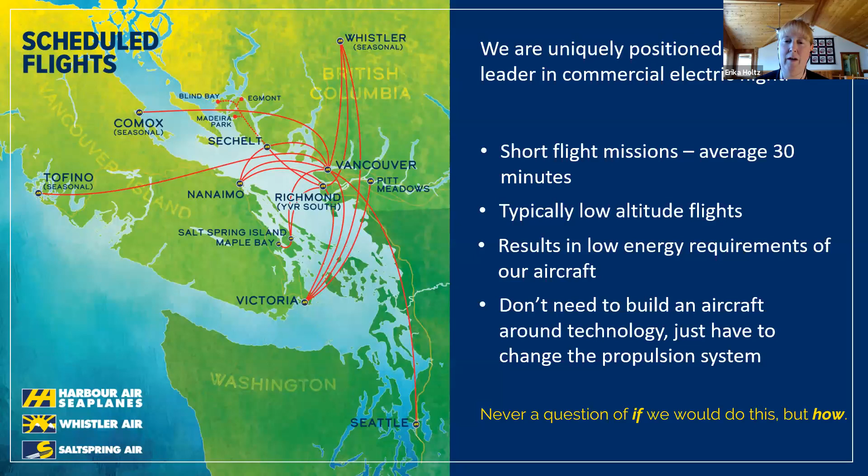So all we needed was the technology. And with our partners, we believe the technology is ready now. So what did we do?

Those who are familiar with aviation will recognize this iconic aircraft. It's a de Havilland DHC-2 Mark I piston Beaver. This particular one we took out of revenue service for this project. It's a single pilot, 6-passenger aircraft at a gross weight of 5,600 pounds.

Our plan was not to change this aircraft materially on the outside. We wanted to leave the exterior as intact as possible while changing the propulsion and everything under the hood. So we removed everything from the firewall forward and gutted the interior of the aircraft, removing anything related to the combustion engine system.

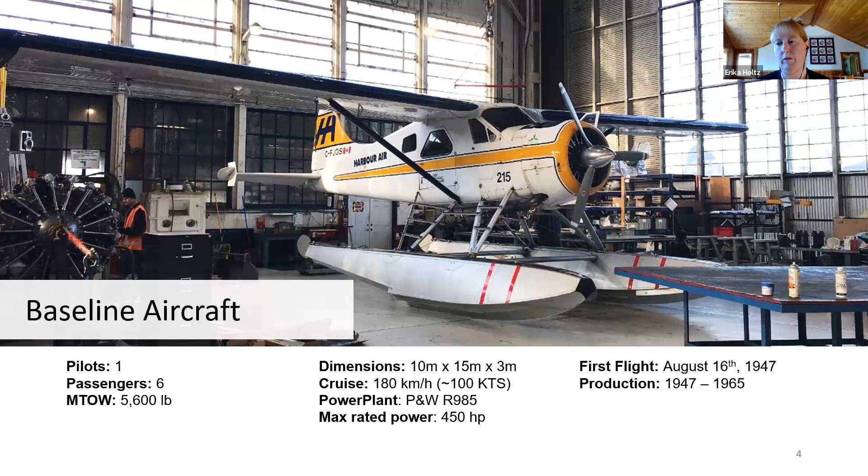Our intention was not to change anything in terms of performance or flight characteristics of this aircraft. So what did we do to it?

We did this. So aside from the incredible paint job change, the exterior doesn't look vastly different. It's got a pointier nose and a little ventral fin on the back. We installed a fully electric Magni 500 engine and a 144 kilowatt hour lithium ion battery pack inside the cabin.

The engine is derated to be the exact same as the engine we took off. The power we removed was a 450 horsepower Pratt & Whitney engine. We put a 338 kilowatt, or 450 horsepower, electric engine on.

It was not our intent to change any of the flight or performance characteristics of the aircraft, because we wanted to concentrate on the novel nature of the propulsion. Electrification hasn't been done before. It hasn't been certified before. What would it actually do to the aircraft? If we had to look at structural or flight changes too, we felt that would diffuse our attention.

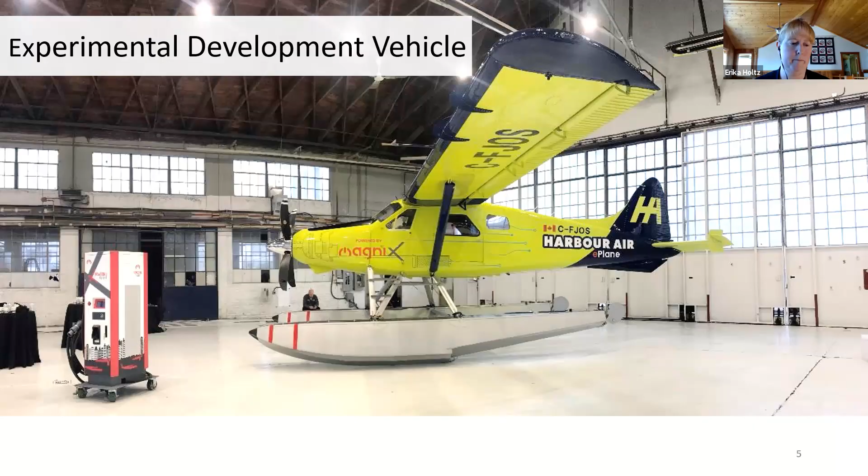So we converted that aircraft in 2019. Since that time, we have performed 78 flights, exploring what changes might have resulted from the conversion. We looked at takeoff performance, cruise, range, climb, and noise testing.

It's really important, especially in urban areas, for us to decrease all emissions—not just fossil fuel burning carbon emissions, but also noise emissions. We looked at how the cooling system would perform, and some other performance-related items important for aviation, like balked landing and loss of power simulations.

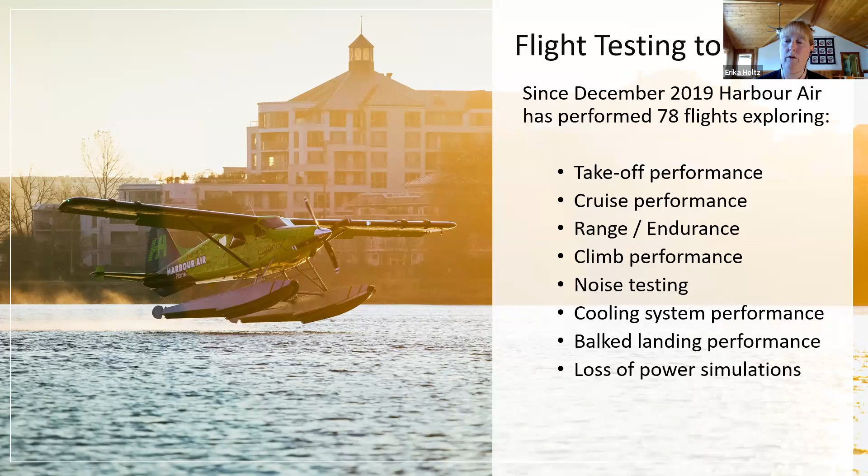The interesting thing is we did get a performance improvement more than we expected, and that alone really accounted for us deciding this was worth moving forward as a viable commercial aircraft. Because I'm an engineer, I get to throw up one data slide. This slide was the reason we decided we could move ahead.

For any aircraft, you have to have a reserve—a 30-minute reserve—calculated based on your cruise power settings. For the Beaver, it's not very efficient; its power required to maintain level flight at cruise is 62% on the original. With the replacement electric engine powertrain, we were able to reduce that down to 41%.

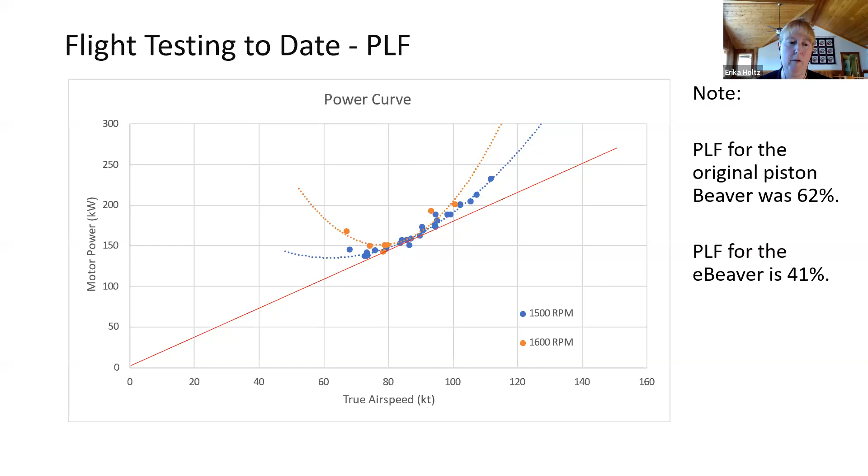What that means is we changed from a 10-minute reserve flight to a 30-minute reserve flight. That, all on its own, aside from all the other good reasons to do this, made this commercially viable for us. So in addition to flight testing for engineers to gather data, we also wanted to look operationally at how this aircraft would operate.

How would it perform doing our scheduled points? What was it going to be like at the scheduled points to charge the aircraft, to manage the aircraft?

So we flew it last summer, and also this spring. We went from Richmond to downtown Vancouver. We went from Richmond to Salt Spring, and Salt Spring to Victoria and back again. We did about half a dozen or eight flights to test our operational conditions. This was really important in informing us on some of the challenges that lie ahead as we continue to work towards electrification of flight.

So what did we learn? I think we all know this to a certain degree, the power source needs to be carbon-free. It's not such an issue in BC, Canada, since 98% of our electricity is produced by hydro. But if you're plugging your batteries in, what are you plugging into? That's a question we get asked every single day.

We are lucky in BC that most of ours is hydro. Recently, you may have seen some charging protocol standardization notices, like Tesla opening up its charging stations to other companies, and Ford and GM have agreed to use them. So we've all been developing our charging infrastructure based on either a CCS1 or a CCS2 protocol, and now it looks like we might all eventually move to what they're calling the NACS protocol.

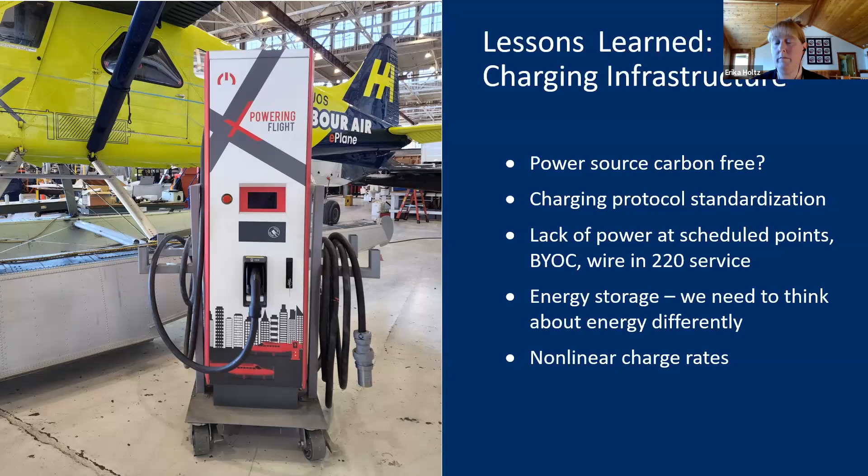Some other miscellaneous items that have come up for us: commonality of markings and placards, cable colors. In aviation, typically orange means flight testing, but orange is also being used to indicate high voltage. There are some things we're going to have to figure out along the way there.

Not so much a problem for us, but for larger aircraft, the takeoff versus landing weight. There are aircraft designs that take advantage of the fact they burn fuel over the course of the flight, so when they land they have a lighter landing weight. That will not be the case here - whatever you take off with is what you're going to land with. That also means aircraft are going to be heavier when empty, sitting on the ramp heavier - for us, that's on the water - and the ground infrastructure may or may not be designed for this condition. It's going to have a high capital cost to start up, but we're anticipating a pretty low operating cost.

The other very interesting thing that keeps coming up is emergency response considerations. If firefighters have to be called because of a thermal runaway event, do they know it's an electric aircraft? Do they know where the batteries are, where the high voltage lines run? Have you considered putting access ports in to ensure they can flood the battery compartments, because they need to get cold water onto the batteries to cool them down and stop the cascading effect? I think we can borrow from the car industry here - they have templates for quick reference guides for firefighters that I think we need to adopt as we move forward with this.

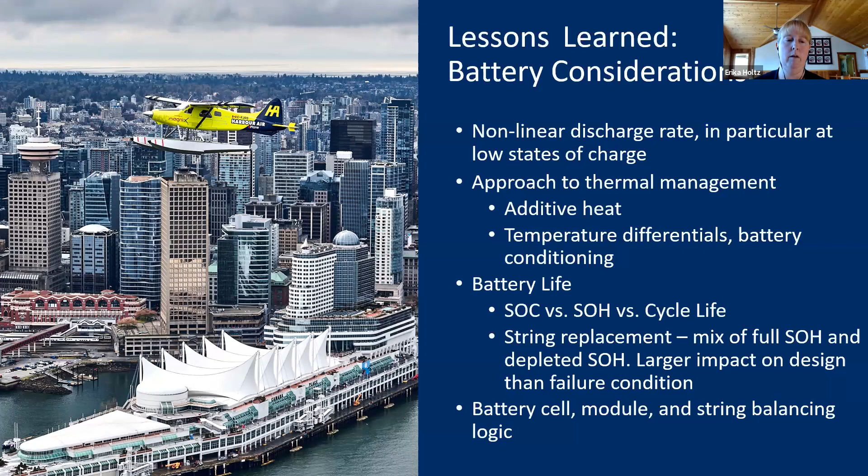So that's a bit of a snapshot of the issues that we've run into. There are more if you want to ask questions, but that's a brief overview.

In terms of next steps for us, in the short term we're continuing to fly this experimental development vehicle. We're trying to develop more test points to aid in determining certification basis. We still have some questions about how electric propulsion can potentially affect flight characteristics - if we're flying at higher altitudes, does the aircraft behave differently even though we haven't changed the available power? It's a very good test bed for that because we can simulate exactly that.

It's exactly what it was before, so how does the propulsion affect flight characteristics? Does it affect flight characteristics? This will also de-risk our validation flight test for our certification machine that we're building. We're also working hard right now to prove that we can do multiple flights in one day - that'll be our next milestone.

So we have a second aircraft that we are building underway. The airframe is ready, we're waiting for parts, but the testing we've done to date with this machine has really informed us that we need to revisit our planned architecture. There were some failure conditions we had to look at, like loss of power control. We were going to use the Magni 350 on our second build, but we've determined that architecture isn't going to work in a loss of power control scenario. So we are redoing that, and we hope to have that aircraft up in the sky next year.

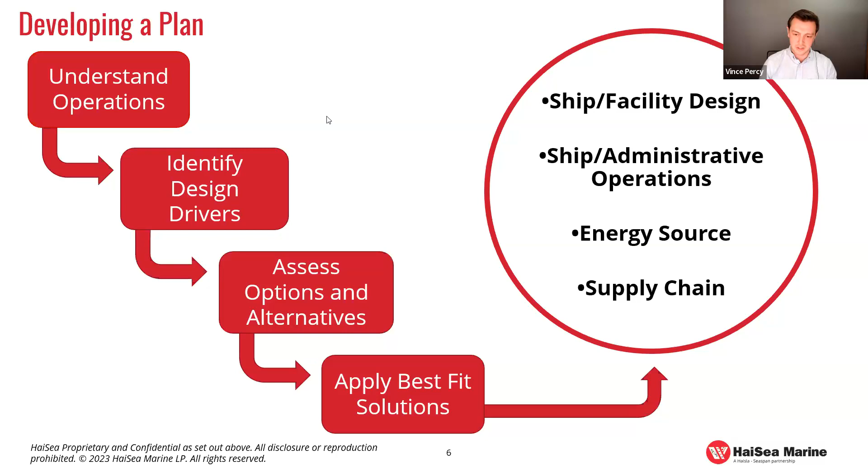And of course, I mentioned the things we were considering, and Erica did a great job of describing a lot of the technical challenges that go into selecting the right equipment and passing the design approval stages, and that cyclical process. We would not be able to do it on our own.

We're heavily reliant on collaboration with our partners, whether that's Robert Allan, the ship designer; Elkon, the integrator; Corvus, the supplier of the batteries; Wärtsilä, the supplier of the LNG tank, its associated LNGPac equipment, and the engines for our escort vessels; Sanmar, the shipyard building our tugs; and ABS, the class society overseeing the construction and will also be our primary class for operation.

With that, we have a sequence of collaboration that also starts with our partner, the Haisla Nation, and local stakeholders, the client LNG Canada for us. Without their understanding of what we're trying to put together, it would be much more difficult for us.

Erica described some of the technical challenge and investment, and it probably doesn't come as a surprise that some of these come with a larger capital cost. Being able to explain that to our clients and have them understand and arrange longer term contracts and create some stability for us to take that risk and reach out and try to find a solution that's going to support our needs in this case.

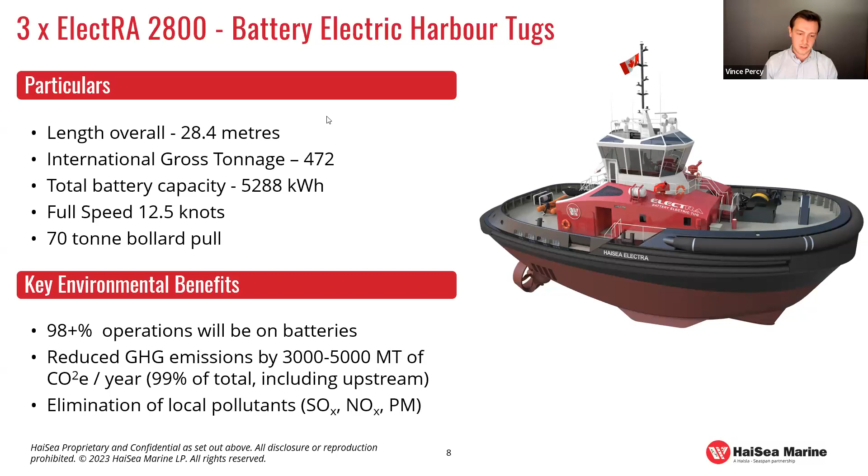Erica did talk about their charger. For us, there's no standard option really available. The integrator had to build the charging equipment within the vessel, and what we're doing is supplying power cables. It is a challenge throughout industry about where you can get that electric power.

Recently, we've come to understand that the earlier you start that discussion, the easier it is to resolve that challenge. If you make it clear what your aim is and what your requirements are, solutions will present themselves. It's just something that has to be planned well in advance and requires a high degree of collaboration.

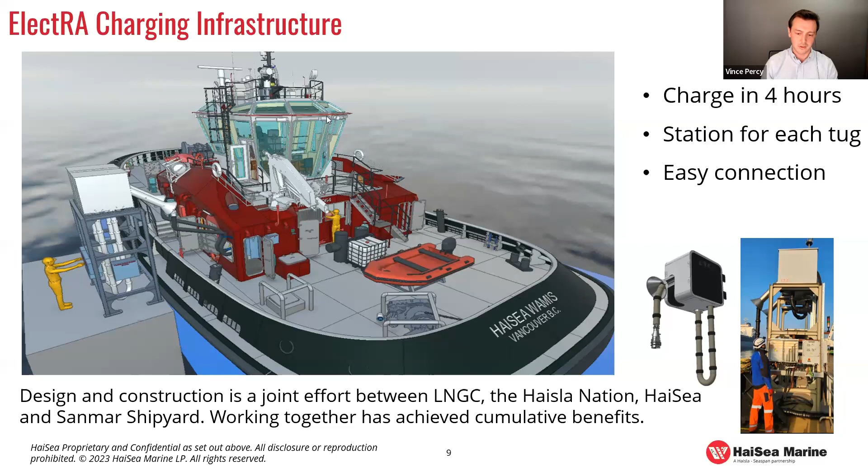For our Escort Tugs, they're 40 meters, so these are bigger vessels. And I showed before that route that they travel - that's 159 nautical miles and has a significantly higher energy requirement, such that we wouldn't be able to fit enough batteries on board to complete that mission. Although we are floating vessels, not like an airplane, we still don't have enough room to travel that far on battery charges, while also being able to provide this 100-ton bollard pull and 14.5 knots to match the speed of a tanker.

The emissions reduction here is approximately 30% for going to LNG over the conventional diesel offering. And in this, we also have the added benefit of reduced SOx, NOx, and PM as well, albeit not as much as batteries. However, this was the best solution as evaluated and according to what's available to us at the time.

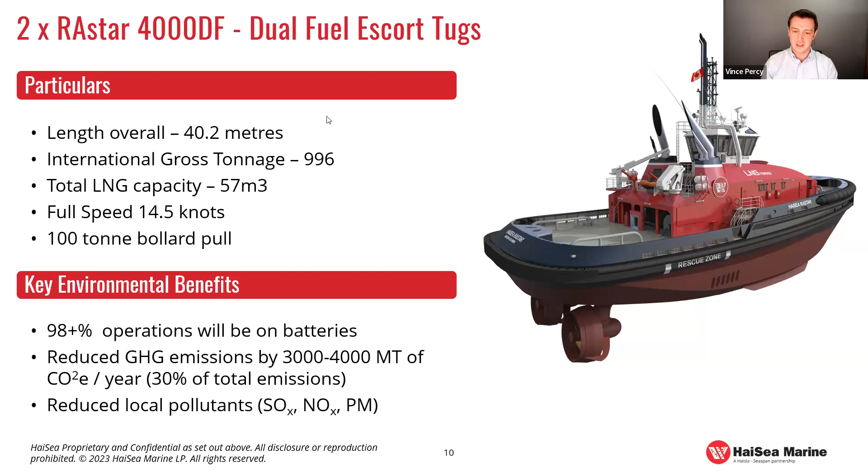I spoke about our bigger picture and incorporating other elements, including our support facility. Those tugs will be docking as close to the LNG Canada export terminal as they can to minimize the amount of distance they need to travel to begin with. Further to that, we have our operations center floating directly next to those tugs. Again, that cuts down on travel. It helps facilitate faster, easier maintenance.

It's purpose-built, built local, powered electrically. And for crew, it also adds some comfort. We recognize that these people will be on board for continuous operation. If they're able to stretch their legs, use the lounge, use the gym in this facility, it's more comfortable arranging a longer rotation on board where they're not flying to and from work as regularly.

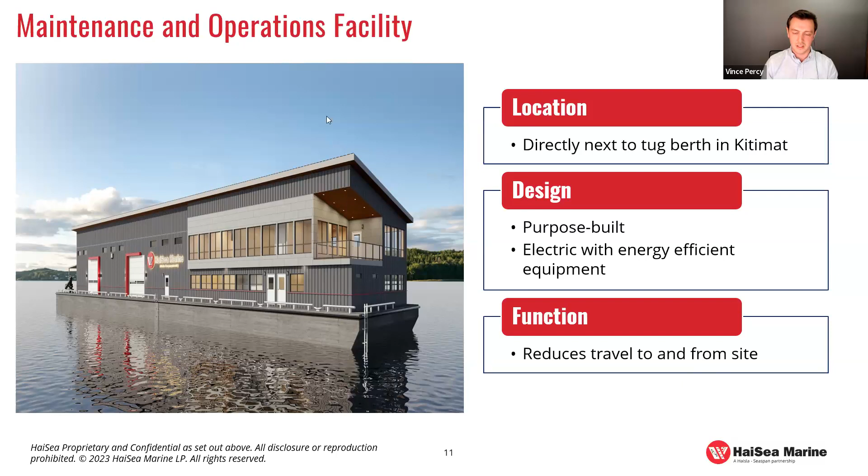We recognize that not all mariners will be based in Kitimat here. We are remote. Where we are now, we've officially completed the construction of our first electric vessel. It is sailing across, it has just passed through the Panama Canal. We're going to expect it in Vancouver Harbour this summer.

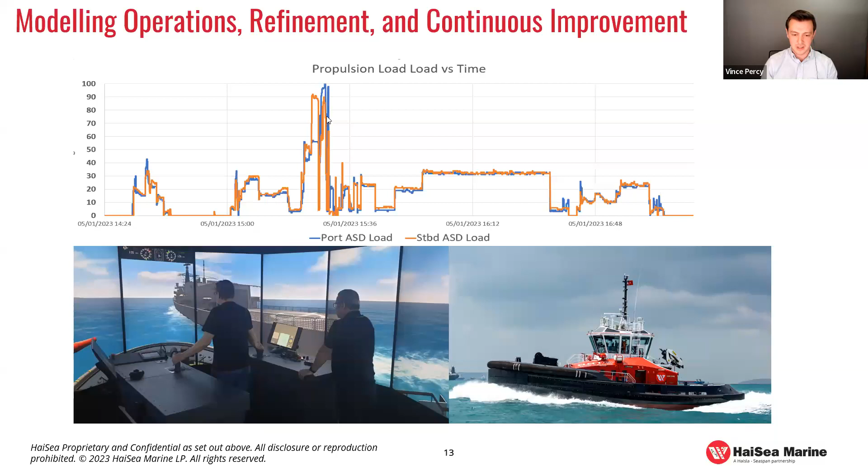What we're doing looking forward is continuing to refine our operations. A lot of this was conceptual to begin with. We do need to test it in real life. Now we've gone through our trials and proven a significant portion of it already. But in line with the high levels of safety that we want to provide, we do need to fully understand the vessel from an operations side as well.

Now, this last slide, there's a lot to unpack here, and I suppose I probably could have broken it down into a couple different slides. But when we look at net zero emissions by 2050, the International Maritime Organization has analyzed global shipping and provided some estimations about where those cuts to current emissions can come from. For us, I've highlighted in green circles some of the pieces we've already applied, and we're definitely seeing some emission savings from the power and propulsion system that we've selected, doing electric drives on our ship docking tugs.

Highlighted here, 50 to 90% savings from going full electric. In our case, we're exceeding 90% for our electric tugs, but that's so dependent on the source of power. For us in BC, where much of our electrical power comes from renewable resources, it's great. In other parts of the world, if the source of that power is coal, it is not greening our entire industry. That's why we're proud to be supporting a project where LNG is displacing some of those less green power sources.

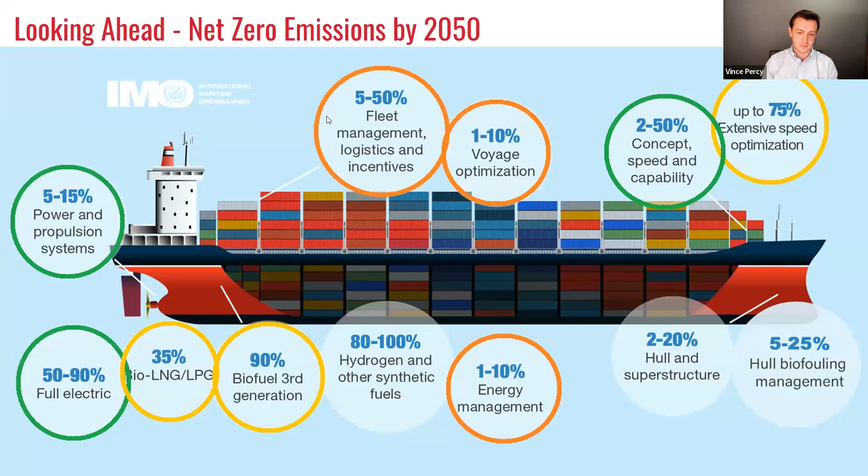Great, Vince, and I like that M&O facility. I think that certainly enriches the job for many in the field. And I really like the guidance that the IMO has put out, which is very similar to what the International Civil Aviation Organization is doing for aviation, where I used to be a representative. So it's nice to see those similarities in terms of the different sectors grappling with net zero and what that all means, and the multiple choices and decisions that one needs to make. In terms of energy choice and propulsion, I think you made a good point that it really depends on the mission, right? And Erica mentioned the same thing.

The type of vessel and power source and propulsion really depends on the mission. So ultimately for HaiSea and Seaspan, will you also have kind of a hybrid or a mixture of different propulsion system ships and energy sources, and how will you manage that? I mean, it'll be a lot more complicated or complex, if you will. What are some of the challenges that you see there?